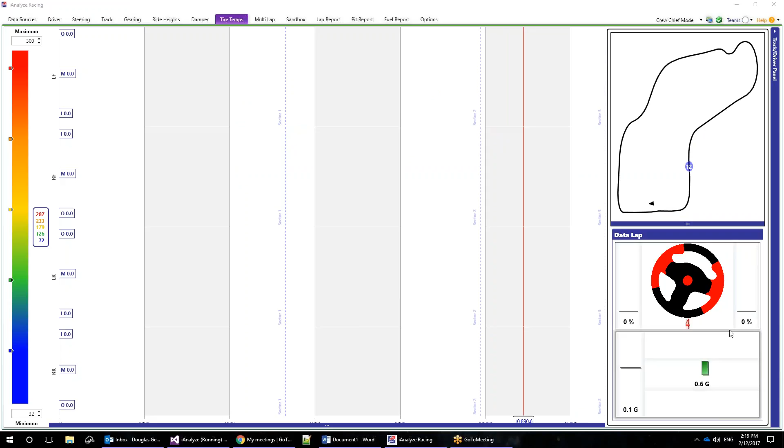So this page here, we can make it different if you have ideas. Christian, give me an idea of more what you're looking for there. Christian has a suggestion here for a user adjustable line for things like ride heights and such.

Christian? Sorry, can you hear me? Yep. Okay, what I was meaning was, for example, say that you, in a specific car, have like a right rear ride height of 80 millimeters that you want to see, and sort of target, and you know that's kind of what you're after.

Maybe you could have like a user input to draw a line across on the graph. So you see how, like on your screen share, you've pointed at 0.92. What if you could just have that line permanently on there, so you didn't have to actually use your cursor? You could just look at the whole trace and see if it was tracking that sort of height you were looking for.

Okay, so what if you did something along the lines of, if you just double-clicked over here in the legend, and it would just put a line of a particular color? That would be great, yeah.

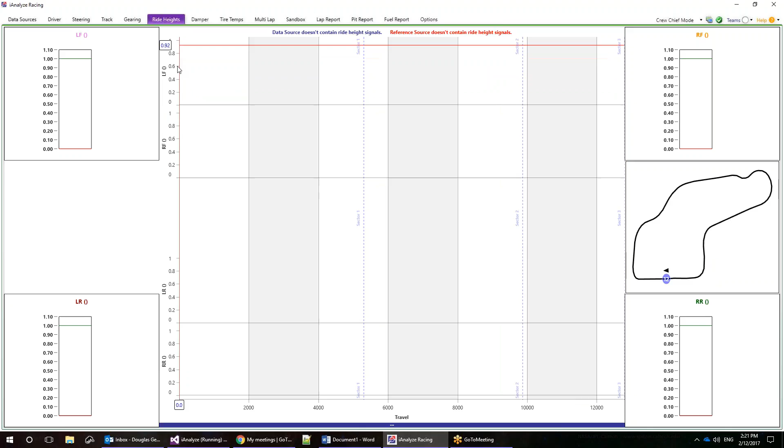Yeah, and then if you double-click, say on the whatever box, let's say it throws a box up or something to identify it, you can just double-click on that, and that'd make it go away. If you double-click at another spot, it would move it accordingly. Okay, yeah, we can take a look at that.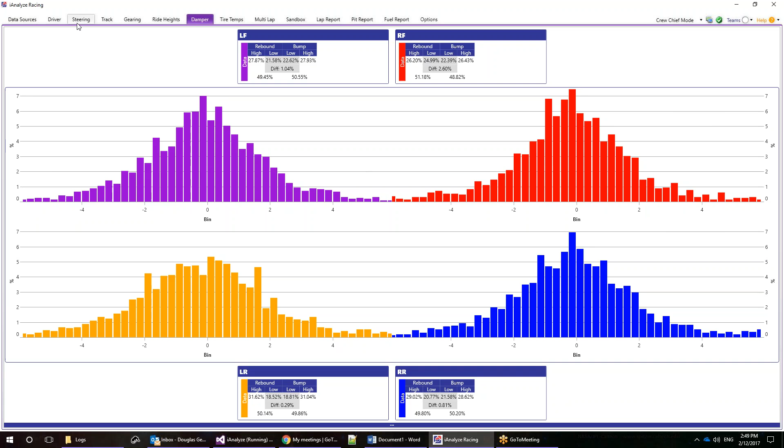Okay, thank you, Doug. Oh, no worries. Let's see, I guess the next thing was Kyle, you wanted to go over the steering plot here.

This actually shows 2 different things, which is great. This is a perfect little graph to kind of show you what's going on. If you don't have this, it relies on the options page.

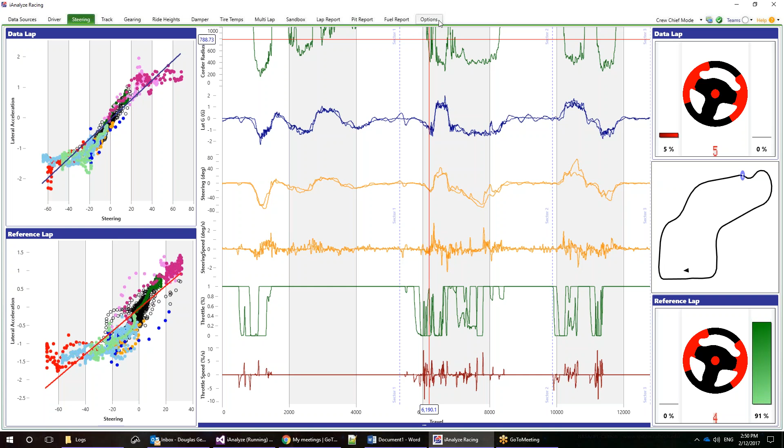On the options page, there's a 'show map turns' checkbox. What this does is turn on the colors to define where the different corners are. These are important because they map to the colors over here on the left side in these graphs.

Just quickly going over this page, it has the steering wheel, the driver inputs, the track map, and also over here on the left a report, the segment comparison report. I find this very useful.

It helps you zero in on where you're faster or slower. Right off the top, you can take a look at, well, in turn 5, oh, it's this little pinkish color here. It'll compare the data lap versus the reference lap and shows you what's faster.

Green, of course, is good, meaning the data lap is faster than the reference lap, which is the way it works throughout the program. If on the time comparisons it's green, that means the data lap is faster. It also shows you the speed at entry and exit and the average speed through the segment, so you can get an idea of where you're picking up speed, losing speed, or what have you.

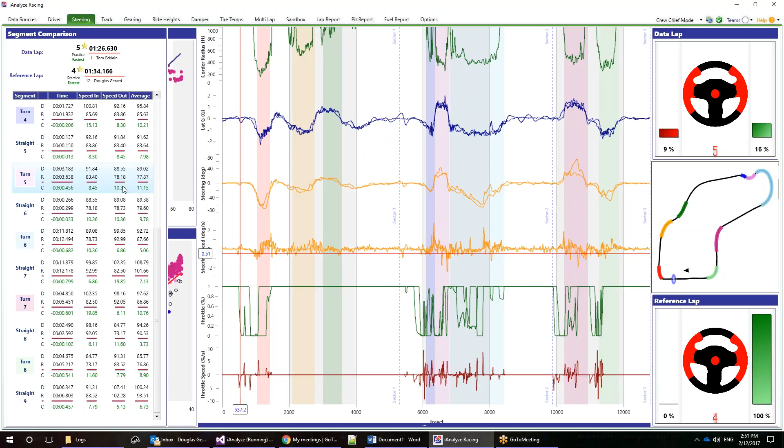I'm one of those guys that goes into the corner to the very last second, brakes as hard as he possibly can, and then turns, which if you get it right is awesome, but more often than not I get it wrong. That's kind of one of the things it helps me show, like, no, take it a little easier there, back off, don't be charging in there like a frustrated bull. You don't want to be doing that, and it keeps you focused on what you're doing there.

But the most important graph on this page, in my mind, is not the center graph, although that information is useful and it's really kind of neat to go in and drill into to compare different things. It doesn't necessarily give you the full detail that these graphs on the left-hand side do.

What these graphs on the left-hand side plot are the lateral acceleration on the y-axis and steering on the x-axis. In the iRacing world, for whatever reason, turning left is positive degrees.

I'm thinking about adding a switch so you can change that, because it makes more sense to me that turning left ought to be negative, and zero, if zero is straight ahead, left is negative, right should be positive. It just makes sense to me that way. But it's backwards in the iRacing world right now, so when you go positive degrees, you're actually turning left.

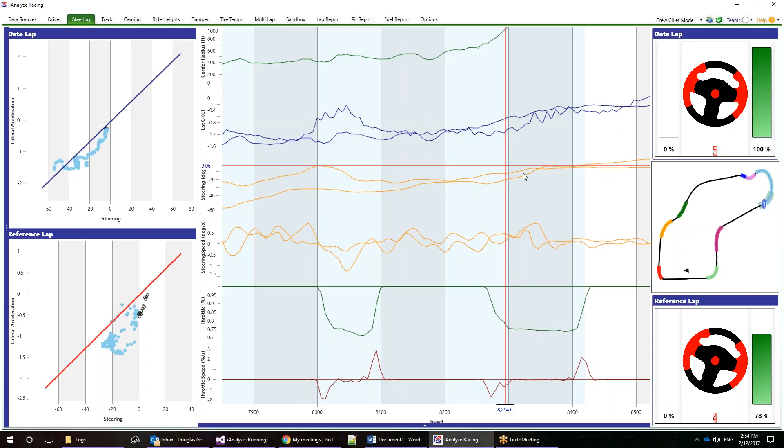Compared to the reference lap, there's no push to the left whatsoever, so that's actually looking pretty good. But to the right, there's a whole bunch of push, particularly in what they call the outer loop now, the big right-hand corner at the Glen.

And into the 90, which is at the end of the front straight at Watkins Glen. So that's kind of what this page shows you.

By the way, if this plot looks like an X, you're in a whole world of hurt, because that X means it's the opposite of what this shows you. It means you've generated a whole bunch of lateral force without that much steering input, so the steering input slaps over to here. That typically shows you've got oversteer going on, and you're correcting for it by turning into the corner. So that's what this plot shows.

Now the rest of this, the corner radius - I don't do a very good job of explaining it, but it's basically the instantaneous corner radius the car is seeing, as generated by the lateral G going through the corner.

Basically what you're looking to see here is this corner. I think I'm missing the apex, or I'm actually way late apexing, so I'm having to unwind the steering, which is probably sliding the car a little bit through here. You're looking more for this kind of corner where you turn in, go through the whole thing, and then ease out of it.

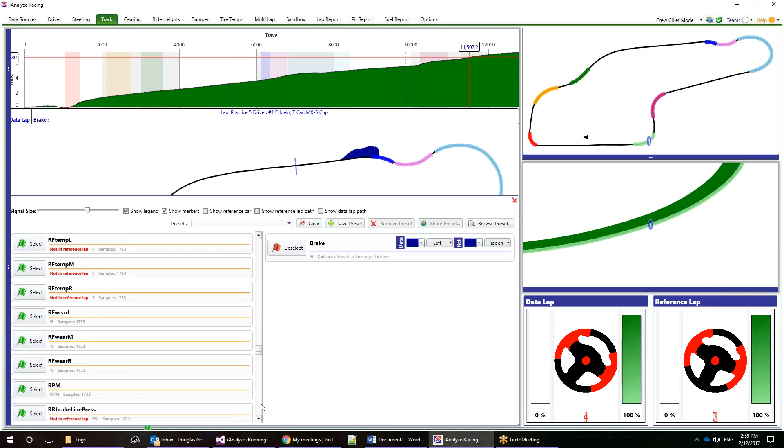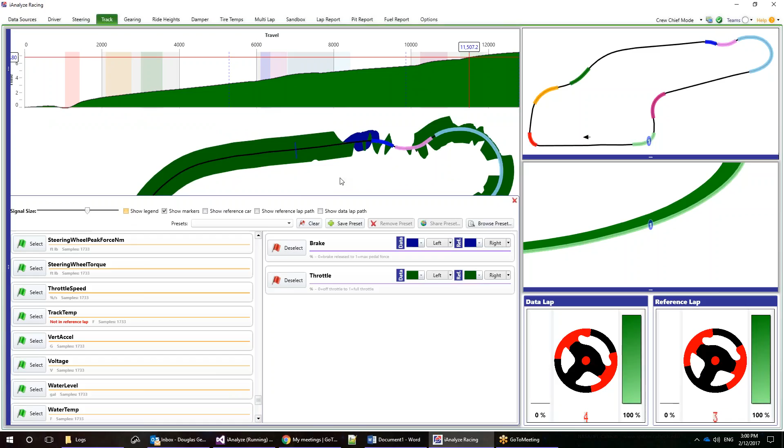With iRacing, I can go into the cockpit of somebody as I'm watching them in a session, especially in team sessions. I can hear when they let off the gas, when they get on it. But unless I have a replay, when somebody says you're fast, what line are you running, and you tell them we're running the same line but with different throttle and braking, is there any way to get a better representation of where you're letting off the throttle, where you're picking up the throttle, how hard you are? It shows percentages and throttle speed, but it's not attuned to where on the track you're at. This track is Phoenix, kind of squiggly, and it doesn't give that reference I could get with a replay, where I can see exactly where they're at on the track, say at the second cone, and see they're off the throttle and already on the brake. Is there any way to make up for iRacing not letting you see that of other people, even in a team session?

I know there's some interest and there's been a number of requests, so maybe I ought to add that to the list of things we need to do. What is it, the blap and olap files? I think those are the extensions, and these are your best lap and best sectors that are responsible for the ghost replay. Including those is something we could do, so when we upload a fast lap, we also upload those two files. So if you download his lap, you have his data, you'll also get his ghost laps, so you can show that compared to what you're doing. I know there's been a request for that.

This information on the throttle, I'm just finding this when you went over the steering, and that's very good information. What I really would like to see is to be able to put that information visually to what the driver sees on the track - basically, where are their marks, so I can see where they're picking up the throttle, how much they're picking it up, how much they're off, but not where they're actually doing it, because the map is rudimentary.

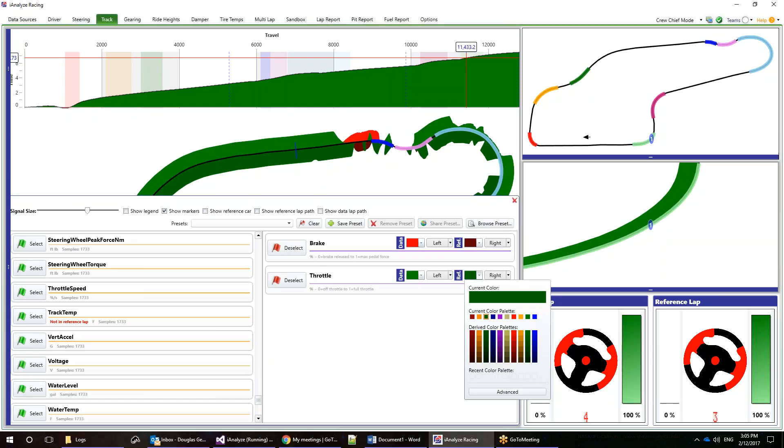The problem, what I'm getting at, is I need to see this data exactly, and Ricky's hitting on this too, exactly when I'm letting off, and be able to see it visually, because at short tracks, 5 feet, 10 feet difference is a tenth, two-tenths difference in track time sometimes. So I want to be able to see this data exactly where it lets off and be able to see it right on the track, what he's seeing visually.

And you can get that if somebody sends you a replay of a lap they've done, but that's a pain in the butt. So ideally, one of the things I've been toying with, and trying to find somebody that's better at DirectX technology stuff than I am.

Can I interject something real quick? Would it be possible to add a scale to the track maps? Because then, even if we couldn't necessarily get it in the sim at this moment, it would give that actual measurement that we're currently lacking.

I think it shows you that on the driver tab, but even still, it doesn't. I believe it has the number of feet on the driver tab. But even that, you're still guessing at how many feet that really is in the sim world.

Almost, if you could replace the track visual graph in the iAnalyze program with the actual replay. If there's some way you could put that replay in there, and then you could follow that track data as they're racing it.

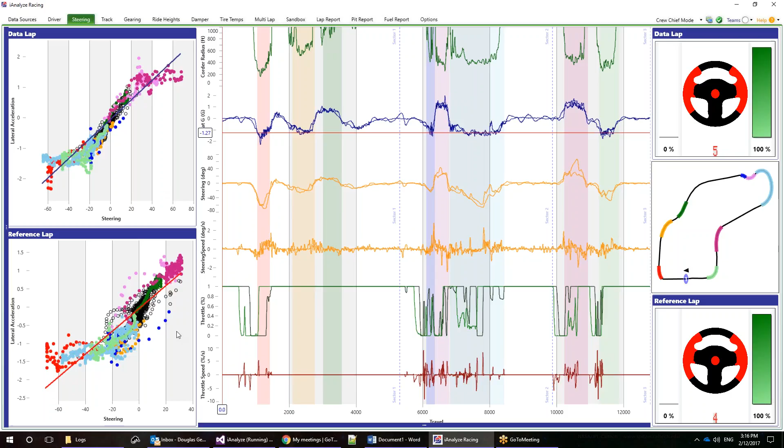The answer is, no it doesn't, but it should track it in the setup. If we look at the setup report here, we don't have any data in the setup report for this data, but it should track that. Maybe that's a thing to add - if there's a steering ratio that's applied, just put it down here so it'll at least note the difference of the steering ratios, so you're comparing apples to apples. That's a really good point.

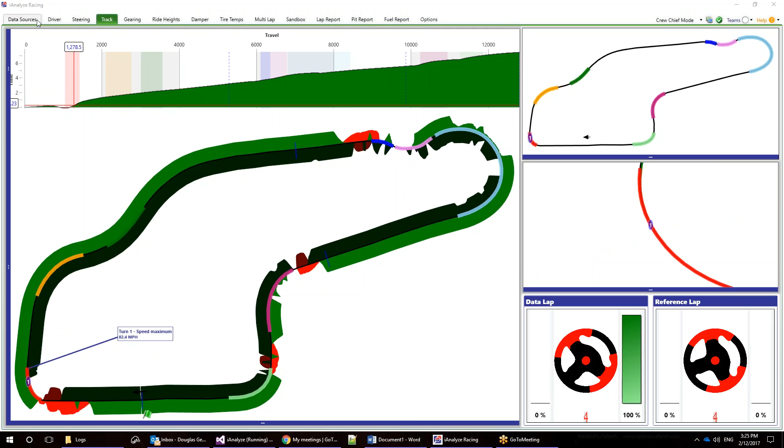So, if I may, Doug, as it is now, in order to see those inputs and things, somebody has to send you a multi-gigabyte size replay from iRacing, which is fine, but then you have to worry about the size of this. This way, they can create a reference lap in iAnalyze, and there's guys out there that do that, the 5,000, 6,000 IR guys that will do that.

If all you have to do is ask them. But this way they say, yeah, I've got iAnalyze, and I've got a reference, and they can send it over in how many kilobytes, or maybe a megabyte or so. Yeah, they're usually 200-300, two, 300 kilobytes. It's way easier, and plus it tells that guy, shoot, iAnalyze, huh? I might want to go get that.

Good idea, guys. I bet you guys deserve all the credit for that one. That is awesome. I like it. It may take me a bit to figure out how to do it effectively because there's going to be some concerns about network lag and what you're actually looking at and how much compute time you're going to want to spend on things. But yeah, we're going to do that. So awesome, guys. Really, really love that idea.

And Brian, you asked a question about the colors. The answer is no, there's no default way to do it. You got to do it by hand, and if you can ever get the programmer to get his act together, he'll actually send a default file with that actually done already for you. I just haven't gotten to it yet, so I'm going to add that to the list.

Yeah, and what Brian was asking was, one of the suggestions I have when you're analyzing data, if you notice you have all these little bars all over the place that pop up and show you different things, what they show is the colors for things here. One thing I like to do is for data laps, let's say for the throttle, I want those both to be green. But for data laps I'll make that a light shade of green, and for the reference lap I'll make it a dark shade of green, so that when I'm looking at the graph, I know which trace I'm looking at without having to think about it.

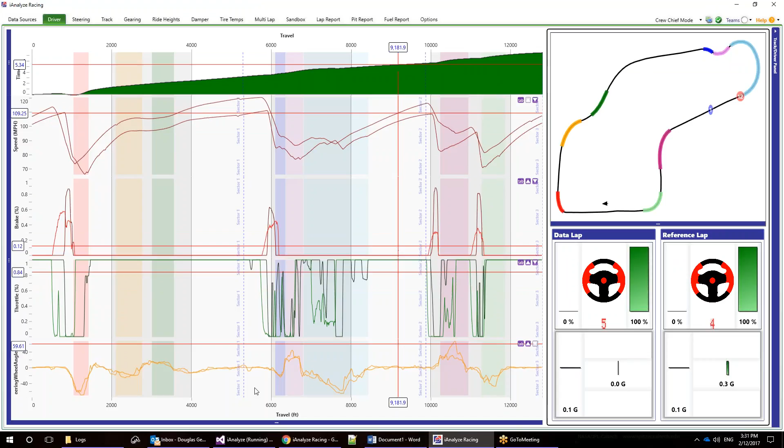And that's another thing to show you guys. In this directory, in the iAnalyze racing directory, there's this grammars.htm file. If you open that up, use Google Chrome, thank you Microsoft, this actually shows you the grammar of everything that you could possibly say.

And the way that you read it is when it says pounds, that's defining a rule. So the top rule, the rule that starts everything, means you can say something from here, from these Windows keys or the information keys, the navigation keys, or an info command, or a pit command, tire pressure commands. So then you can go down and let's look for the tire pressure commands because we were talking about them.

So for the tire pressure command, you could say 'set right front tire' - if we go to individual tire, it'll say right front whatever. Set right front tire or tire pressure to 1.2 kilopascals, pounds per square inch, or just pounds or psi. Or you can use bar as well for those of you in Canada and Europe.

So this kind of defines all of the things, and you'll notice it's not implemented for all of the languages. Sometimes things are only in English because I don't speak all these languages, and I have to get my interpreters and translators to go back through and do it, and I just haven't had the time to go back through and do that yet. But it does give you all of the different things you can say in terms of this.

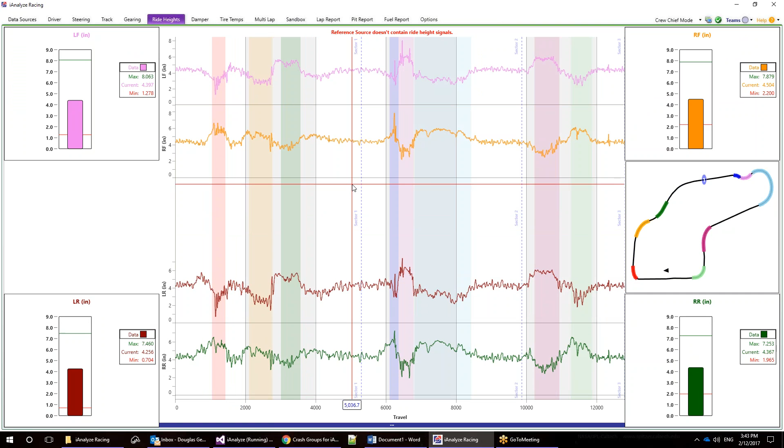Instead of just having the heat over distance plot like what you've got now with everything stacked, changing it into a format so it's more of a grid type look that still has that distance plot. So the top left corner would be the left front, and next to it would be kind of like how you have the dampers or the page. Yeah, it'd be like that. So you've got a specific plot for each corner of the car, arranged in a way that you can physically see what's going on. Using the left front as an example - you've got that block, you have the outer on the left side, the middle in the middle, and the inner on the right side of that graph. Then you move over to the right front - you've got the inner on the left side, middle in the middle, and the outer on the right side. That way, when you look at this as you would a car from top down, the tires where they're at match where they are.

So for oval guys, they can look and see what the tires are doing when going through the corners - obviously the outside of the right front's going to get hotter, as well as the inside of the left front, because the car is shifting on momentum that way. With the road guys it's the same thing - when they're going through different corners, some with a larger radius, some shorter, they can still identify what the car is doing when it shifts its momentum, whether it's a small shift or rapid shift.

They can spot that looking at the car as if it was actually on track, rather than having this line set up - like if I want to try and compare the left front and the left rear, right now I've got two blocks I have to look at, and one in the center that's still going to be a visual distraction to me.

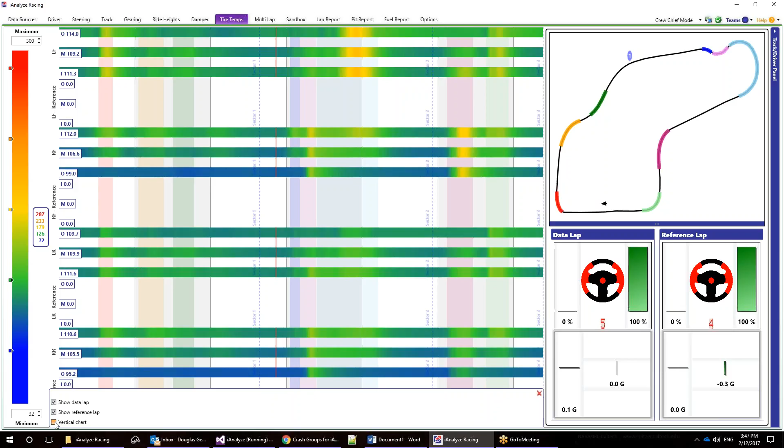Oh, we can do a vertical chart. When did I put that in there? Does anybody know when I did that? Yesterday, probably, because this is a development version. Okay, so if we... it doesn't work. That's why. Okay, I got it. That was the original idea, I think.

But we could make it so that this is customizable like the driver page, and we can even add the ability to hide tires, so you can only look at the two that you're interested in.

Hey Doug, go to the sandbox for a minute and pull up that tire temp plot and see if that's kind of what they're talking about or not. Maybe not, I don't know. It's hard to talk about it over the...

No, just wait. Yeah, let's see, it's called tire temp, but I don't know what it's... I'm looking for the... Just look for the right one. Tire temp plot, this one here, or mine? Yeah, yours, I think. I think they're the same, but anyway. Okay.

I could have a biased opinion here, but I kind of like the way that Motec does it, to where they do it in a line form. Yeah, like this graph here shows. I like that there. Okay, yeah, that's kind of what I like too. You see this one here, I don't think you could do it this way because the amount of horizontal space you have to relay that information isn't enough.

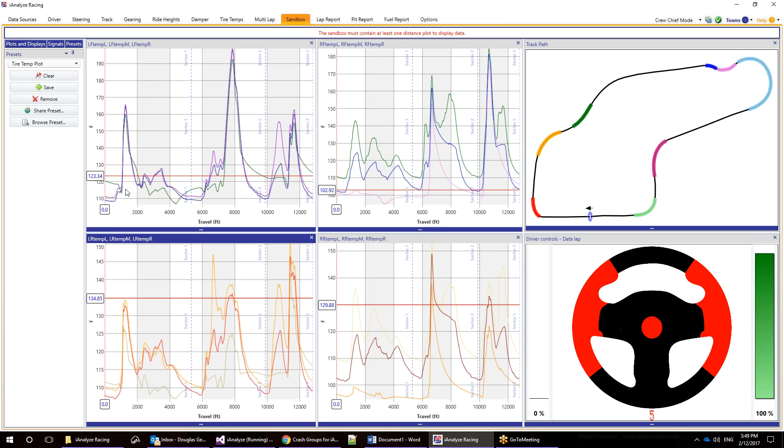Okay, but I'll give it some more thought and see what we're doing to make that all happen appropriately.

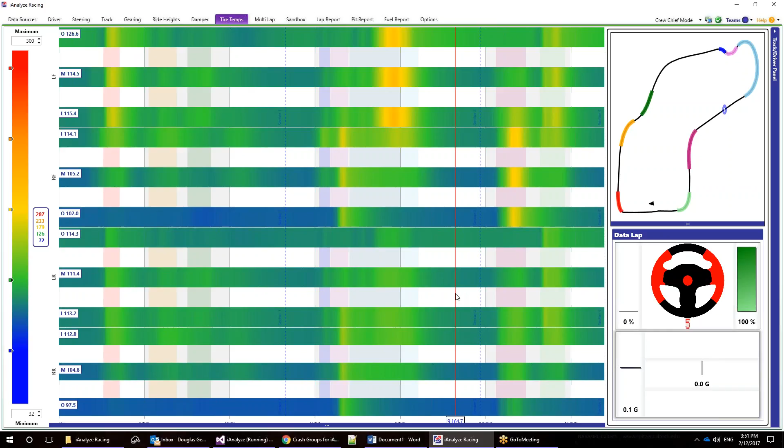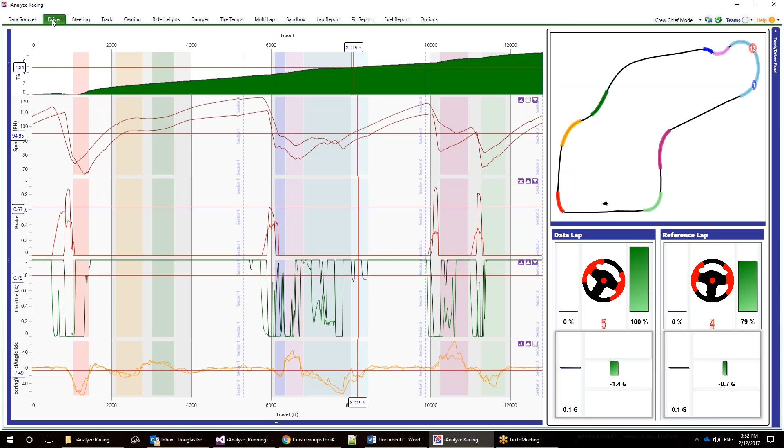Doug, I got one quick question you can probably answer. On several of these tabs, from data source all the way to fuel reports, there's a map, and it looks like a kindergartner sketched it. Is that the actual path you took around the track, or just a rough graphic representation so it could fit into the little box? That is the path you took around the racetrack. It's a 2D representation.

Is there any way you can, in a transparent way, put the actual track on it so you can see it properly? Because until you answered that, I had no idea. So you could choose to put the track transparently in the background as it's actually represented, so you could actually see the path you're taking around the track.

The answer is yes, but. Believe it or not, iRacing actually uses honest-to-gosh GPS coordinates for the track path you're actually on. The problem is that the GPS coordinates aren't necessarily the same as what you'd find in, say, Google Earth, or Google Maps, or what have you.

The way I would do something like that is, we don't get the data from the actual track data, or how to read it, from iRacing. All we get is data from the race car. So to do what you want, we'd have to scale the bitmaps, or go to Google Earth or Google Maps and say, give me this area, these are the coordinates I'm interested in, and try to map that and overlay it. But it won't always overlay properly, because of differences between the tracks or GPS coordinate shifts, since they set up a local station for that, which can cause a little bit of difference in the answers.

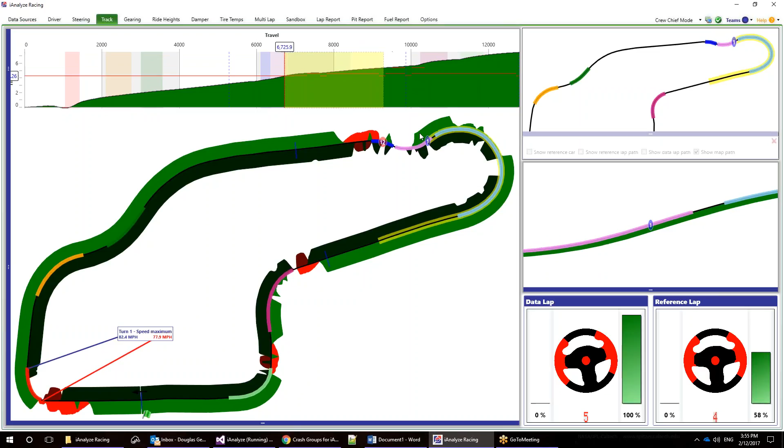I thought it was just a limitation of the graphic program and the size of the box and so forth. Well, yeah, there's some of that. You only have so much space, but on the track map, you can zoom in and it'll show you a much bigger, more detailed view. So having that kind of thing would be useful.

I think the problem you might run into is, where is the GPS data based off the car? Is it based off the center of the car? Good question, I don't know. You'd have to ask iRacing.

You'd still have a whole issue, I mean even if you took your idea, say for example an oval track, you ran a lap on the outside and a lap on the inside. Depending on where that GPS data is coming from in relation to the car, you'd have to figure out how to offset that to get the actual edge of the track. Right, because if it's in the center of the car, there's 3 feet on the outside, and if you're on the inside, there's 3 feet to the inside. I get what you're saying there.

Yeah, that's a good point, Dave, and that's actually a question I can ask the iRacing guys. I have a decent enough relationship with them that I'll say, hey guys, how does this all work? How could I accomplish this type of thing, or is that data you can give me? Because they might just hand that data to me. They might have that in some file somewhere they can massage and send to me. So that's worth a question to them.